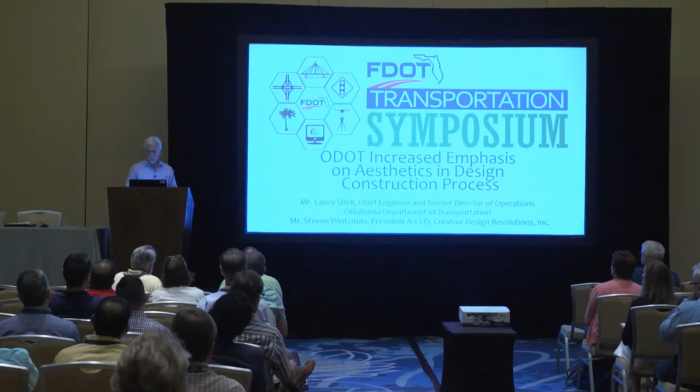I'm gratified at what a good turnout this is. There's not a lot that I can add to this. When two directors of a DOT, chief engineer, district engineers, community members, mayors, directors of operations get together and they say this is bringing value to our city, especially people that are very mindful about spending monies.

It's something that people like us, who have devoted much of our lives to infrastructure, pay attention to. I can speak to what CDR does, Creative Design Resolutions, because we are the premier company that incorporates aesthetics into infrastructure. We've worked for a quarter of all the DOTs in the country, and we've done this for nearly 25 years. I'm sure there are others that do it, so I'm going to talk generically, but I'll speak to how we do our business, because I think this might be very informative.

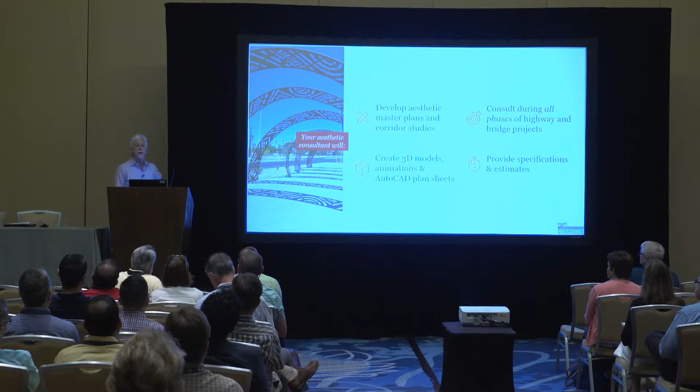This is not aesthetics that are just going to, as you've heard said, put lipstick on a pig. These are things that are actually incorporated into the architecture, into the programming, into the engineering of your projects, defined by what the client wants, the stakeholders, and their constituents.

And what we do to do that is this: we have community meetings, and we show past work like we're doing now, and engage a conversation. How do you feel about yourself? And then in the end, when we come back, we will provide aesthetic suggestions. And then, of course, in the end, we do 3D models. You'll see some movies and so on as a way of visualizing what this is going to look like in the future, and options derived from you all, not just by a design firm.

So these aesthetics specifically are built to be from your community. They are contextually of this place. If you moved it to somewhere else, it wouldn't fit anymore. It tells a story. What we say at CDR is that we're storytellers of the clients we work for.

The most successful urban design projects come through a collaboration of communities in the development and design process. We track the engineers of record, or in-house engineering, with our aesthetics. So each project is site-specific, and it will tell the story of your community.

By the architecture all around, right? The history, your commerce, your vision, your values, the natural environment, your aspirations for the future, all of that. Why not incorporate that into your structures? Why not? It's just concrete, and you're going to have to form it anyway.

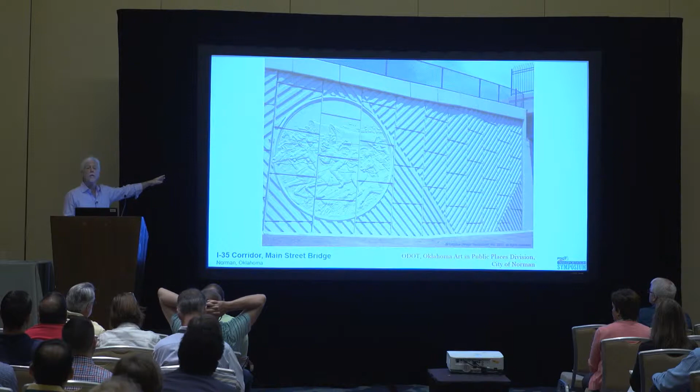So first thing we'll talk about is bridges. Casey mentioned this detail here, this medallion on the bridge, on the Main Street Bridge. First of all, just to keep in mind, this 18-foot diameter MSE panel, that relief that you see, that's foreground, middle ground, background. The depth of relief there is 1.5 inches. For all of you who think this is going to be a very expensive proposition, all this stuff you're seeing, you're mistaken. But I didn't show you the slide for that.

I showed you the slide for those flutes. You see those flutes that were created to make these gigantic triangles look like topography that you might see on the plains of Oklahoma, like this. But remember now, we are designing these things to be repurposed, to be modular. Every design you see here, every design we make, is a modular design, meaning it doesn't have to just be used this one time, this one way, and repeated and repeated and repeated. In fact, it can be reconfigured, reoriented, combined with other designs to create the story of your state.

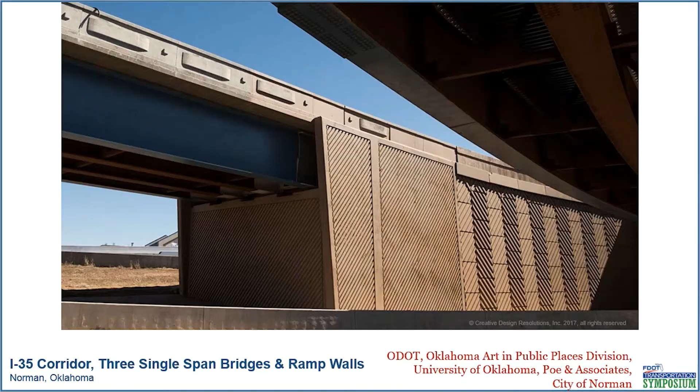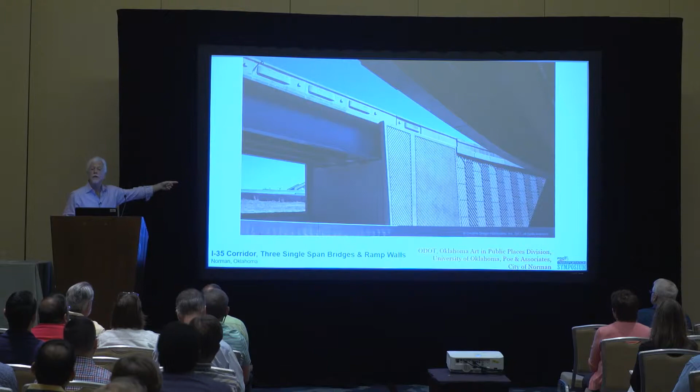So you look at this design, and they didn't have a lot of money. They had about three single-span bridges and tens of thousands of retaining walls. So we just took it and we reconfigured those same liners that they own. This is the key as you're looking at this. Director Ridley and I came up with this idea.

Think about normal means and methods and business practices of your contractors. They will buy the cheapest form liner they can to do that fractured fin on the wall. You get 2 or 3 pours out of it, then they'll throw it away, move down, get another liner, and so on down the line. All that adds up.

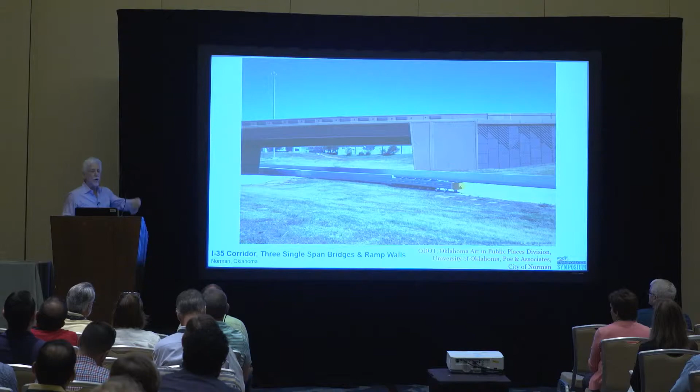Versus we specify urethane liners, you can get 50 to 100 usages out of it. So a little more investment up front, but it exceeds the first project. They warehouse it, they account for it, they qualify it and quantify it. They check it in and out like library books. This makes the next project thousands of dollars cheaper, and if the contractor doesn't take good care of it, they have to replace it.

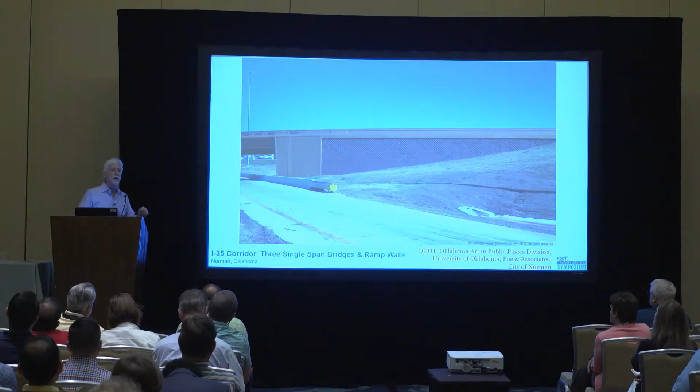We changed, slightly, the way the state contracts for these projects. Because who owns these things in this state? Not the contractor. You do, because you paid for it, you see?

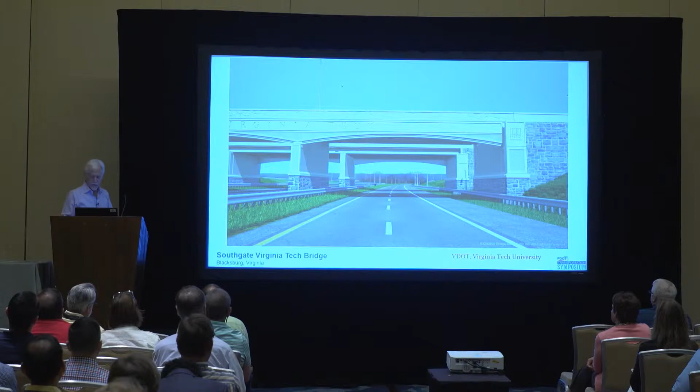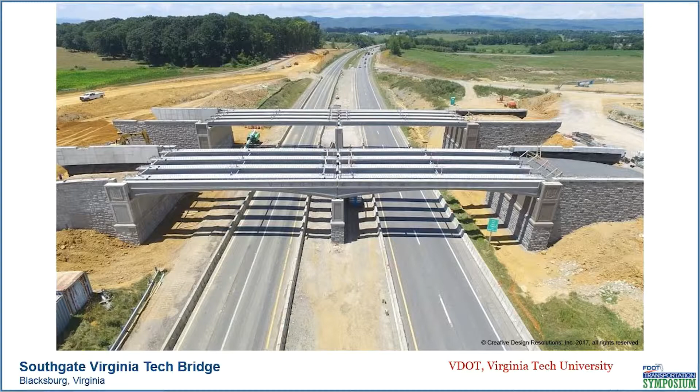So now I'm going to move outside of Colorado to give you a quick overview of other work. Another bridge before a university, this is Virginia Tech. They have Hokie stone, their favorite little stone they use. So this was a quick computer model, and this is the bridge being built right now. You can see the spandrel being installed. Really, anything is possible.

Concrete is the cheapest, most plastic material you can use that has the longevity that it does. There's so much more that we can do with it.

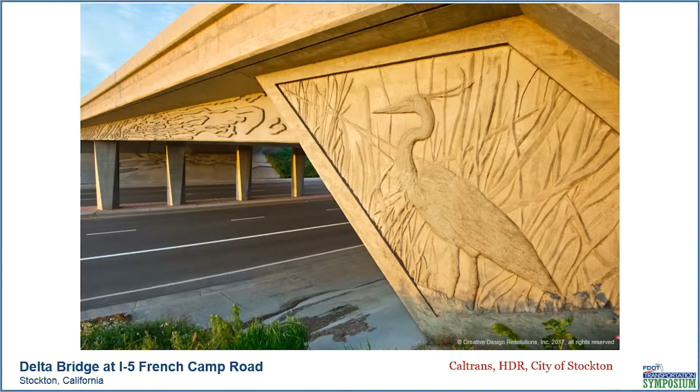Caltrans, we did this wonderful project for Caltrans in Stockton, California. They don't like staining their bridges because it gets tagged. We did this bridge a number of years ago, and it has never gotten tagged. In fact, I'd say 99% of the bridges and highways we've ever made has never been tagged. One reason is this: we get the community involved and they take ownership, they have something to say about what it looks like, and they like it.

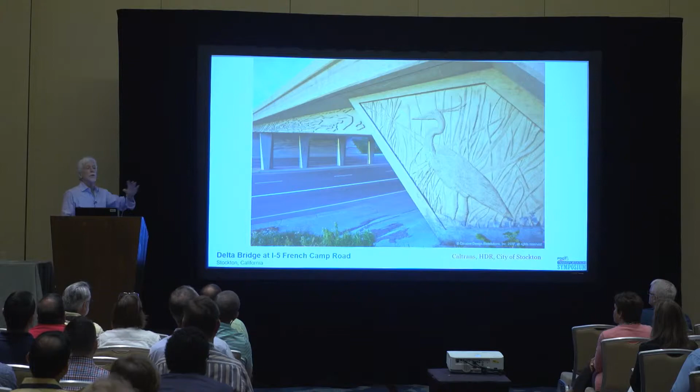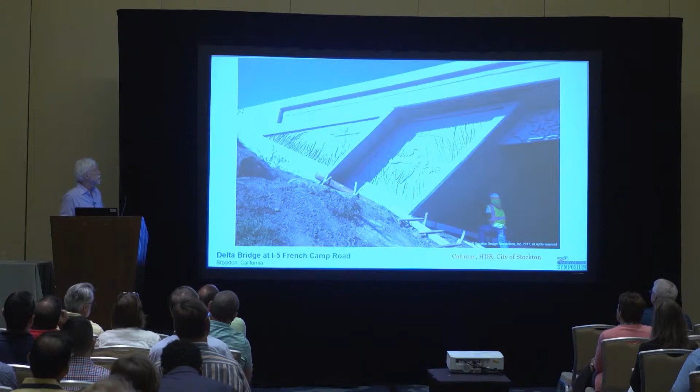So here is Stockton, California, the breadbasket of this country. It's all about the delta, the flora and fauna, the water going through it and the natural environment. So you see that in the wing walls. You see how we have trout, great blue herons.

You'll see this precast, prestressed concrete beam that looks like the delta as seen from a plane. And then something like this, which I'm sure you have never seen. Slope walls are a wonderful, large bit of architecture that is unused. We stamp them, we sometimes stain them, but in this case we wanted to make a view of what the delta looks like from 100 miles up. So we just used what you're looking at here.

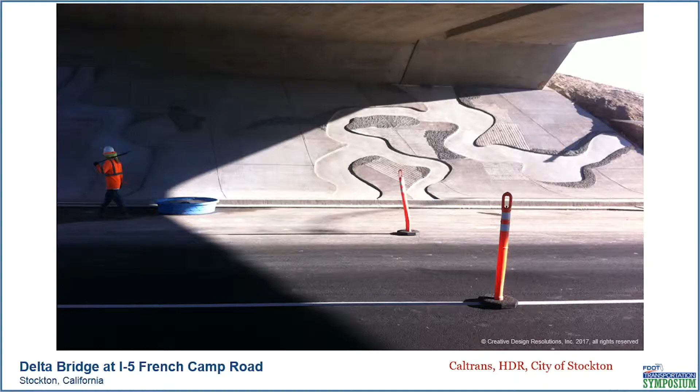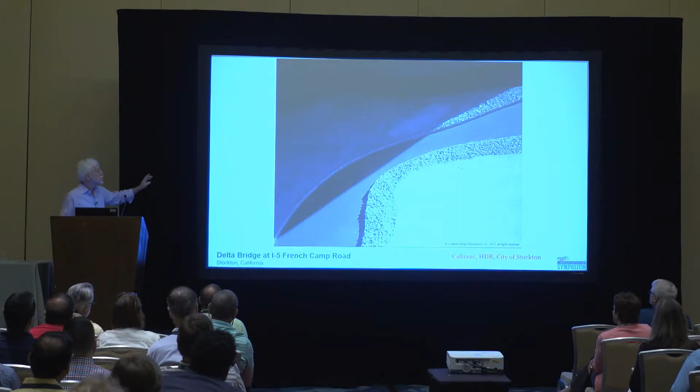Each one of these slope walls is 60 feet high and hundreds of feet long, using metal trowels, raked finishes, timing, all those different effects. Each one of these was done in one day. It just followed your contractor. Nothing that you see here delays a project or creates a cost overrun. We've been doing this for nearly 25 years. We have never once been late, and we have never once been over budget.

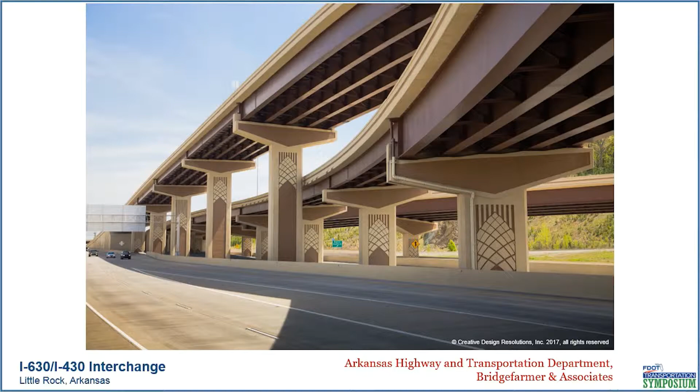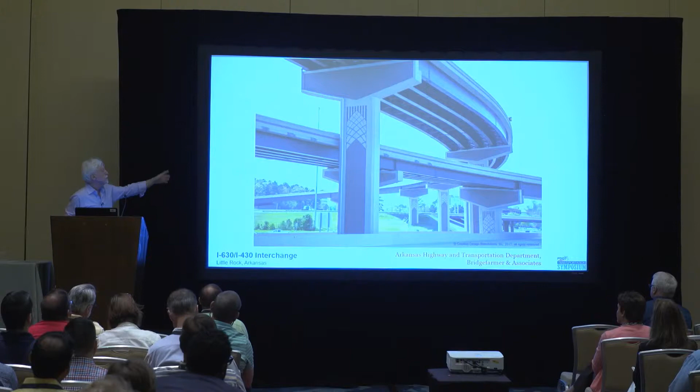We track you. This was a great Big Rock project outside of Little Rock, Arkansas. They commissioned us to design it. They had just piers after piers after piers, so we created a modular design that could grow and shrink, that could be organized by color. This flyover ramp, a bent of piers or collection of piers, may have one color, and this one has a slightly different color. Of course, that's a stylized pine cone from the loblolly pine, the state tree, in case you didn't notice.

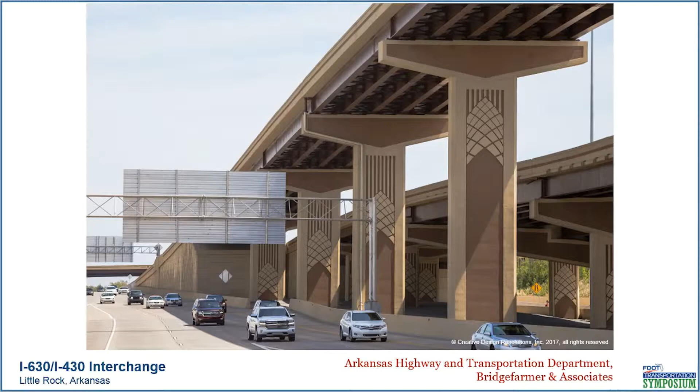And on their parapet, see how elegant that is, timeless in its design. It's just architecture, and there's the state silhouette on their parapet. I'm going to go back to that project in a moment.

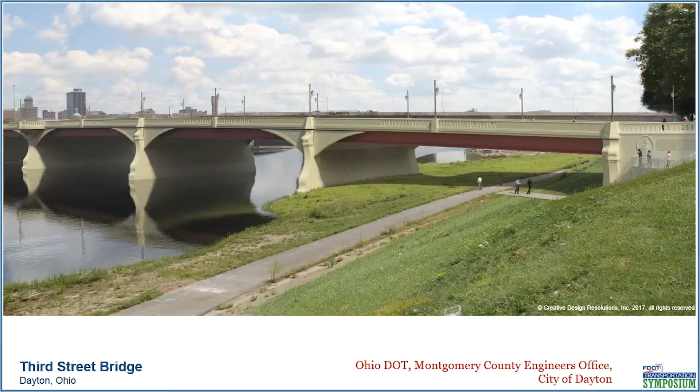So here's an interesting bridge, and this is something very important, talking about community. This is for the city of Dayton, Ohio. This city is divided by the Great Miami River. And when I say divided, I don't mean just physically divided — I mean divided economically, divided racially, divided in all sorts of ways.

So when they brought us in for this community meeting, they wanted us to somehow glean from the audience how they see themselves, what they want this new bridge to speak about. Now, of course, I go there, we do our research, and I say, well, Dayton, Ohio, that's where the Wright brothers created their plane, the Wright B Flyer for World War I.

That's another important aspect of Dayton. I had some ideas, but I didn't want to go in with any prejudice.

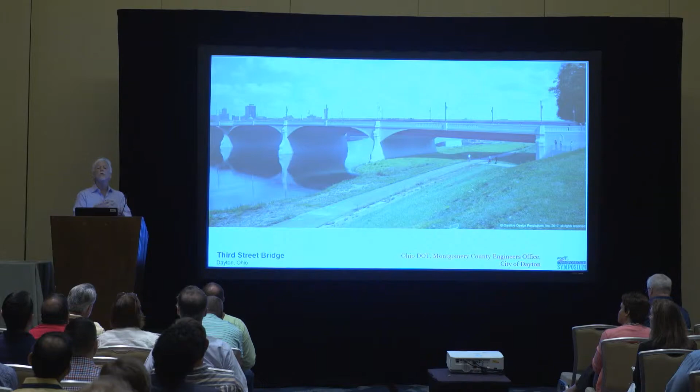I walked in, and the entire audience was African American on the west side. I'm standing in front and I say, okay, please tell me about this bridge. Tell me about your city. What do you want? And they said, do you realize we close this bridge down once a year in solidarity to the Selma March that Martin Luther King had?

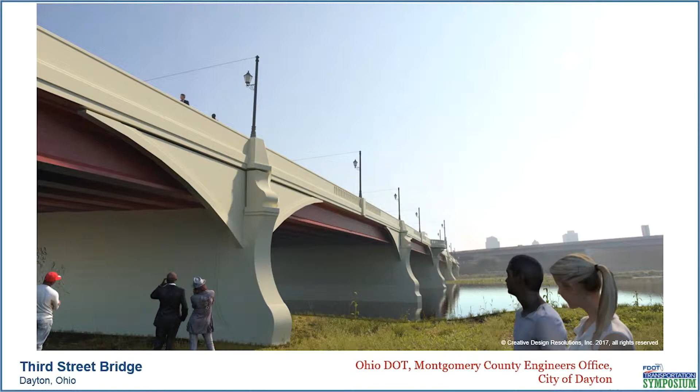This road is called Martin Luther King Boulevard. This bridge is called the Peace Bridge. Oh, did I not mention that on the west side, the opposite side of downtown, the African American neighborhood, that's where the Wright brothers had their bike shop? That's where the airplane was invented. You start seeing how important that side of the city is.

And the building stock looks like, well, Georgetown, like Virginia—old, beautiful architecture. How do you tell that story? How do you involve all these people, downtown, all nationalities, all histories? How do you do that?

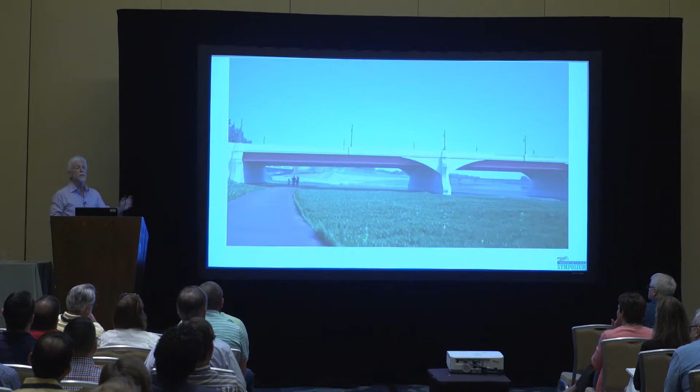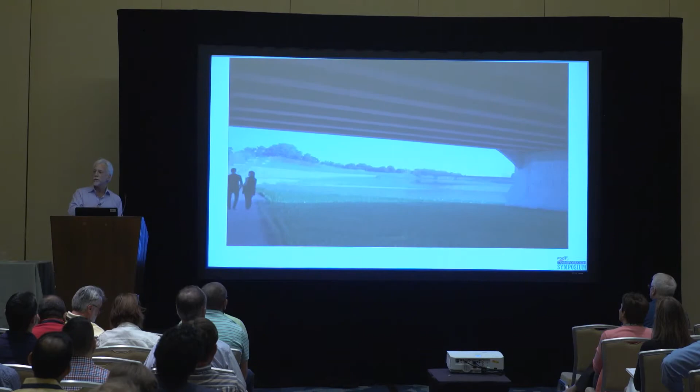Well, because there are locations to do that. If you have a bridge with light rail on top and bike riders going across, how do you get from there down to the hike bike path at the bottom? How do you go from the hike bike path up to the very top? What do you want that experience to be like? Do you just want them moving from point A to point B? Or how about telling the story of why you're there, why this is there, why these people are there? This is an opportunity to plant seeds.

Hold on, let me turn this down.

Okay, all right, this is another project. When we have a chance—like the previous project you saw—we were able to design the architecture as well. When the engineers allow us to come in early, we can actually affect the architecture, and that's where it gets really inexpensive.

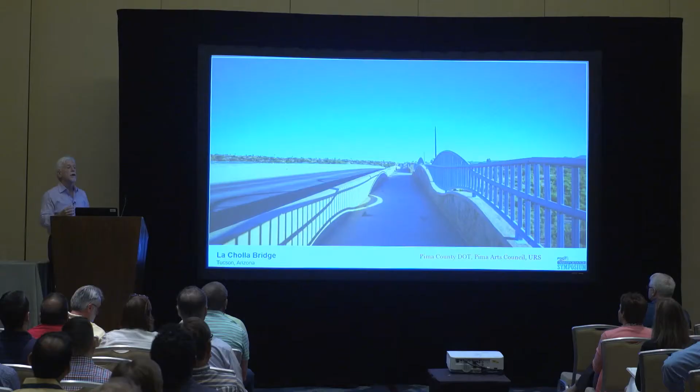What's the difference between a pier bent with round column piers, square column piers, hammerhead piers, or a pier wall? Nothing. They all carry the load, they all cost about the same. It's the architecture—does it support the theme?

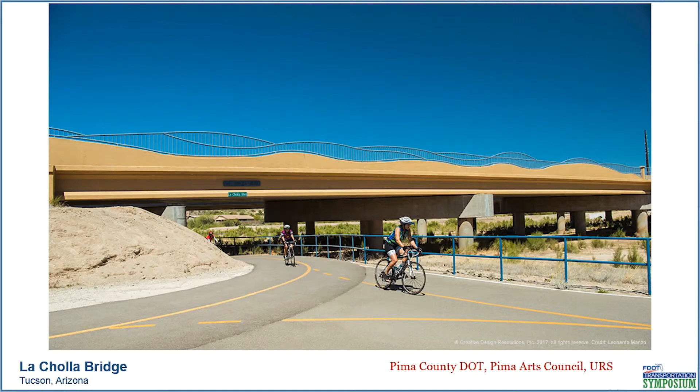The La Cholla Bridge was built over a wash with a few neighborhoods in it, and our challenge was: Stephen, we want this to be a signature bridge, but we want it to be invisible. We don't want it lit up. We want to see the stars at night, but we want it to speak to where we are.

We're in a wash that divides the city when it rains. It's La Cholla Bridge, which means the cactus. How can you make this bridge noticeable, signature, but invisible?

We recommended you take the sand from the wash and use it in your concrete mix. You take the color of the sand from the wash and use it for the stain. You take the parapet and undulate it like it would be water. You make the railing undulate like water. And you take the inside of the parapet and put reliefs of chollas on it. Why not? You have to cast your concrete against something anyway.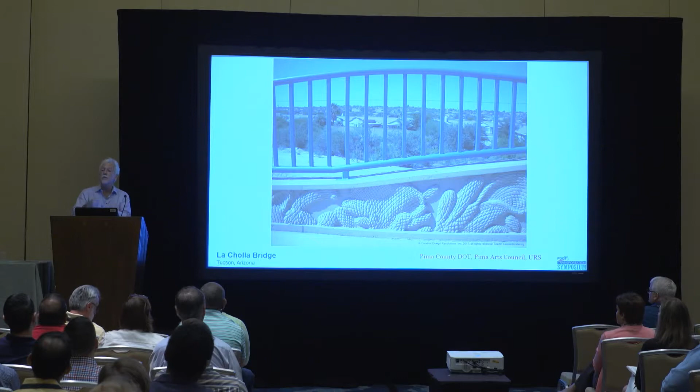In every square yard of concrete, one of the aggregate line items in the cost of making it is the form liner—aggregate, water, cement, labor, forms, form liner. It's already in your budget. It's how you use that money and how it can serve you later.

So look at the opportunities. Anything is possible. And that's just bridges.

Retaining walls—imagine having a design like this. Each one of those squares, just so you understand scale, is 12.5 feet square, 25 feet high. This design is 4 miles long, and it doesn't repeat.

And there are only 24 liners. But those 24 liners can do this, this, this, this, this, this—so many combinations, permutations, unlimited. Reusable over and over again.

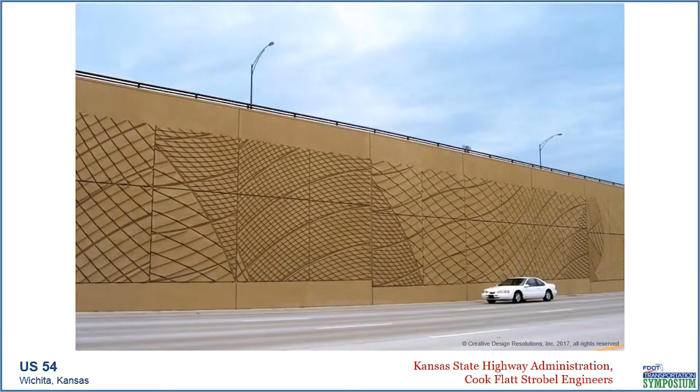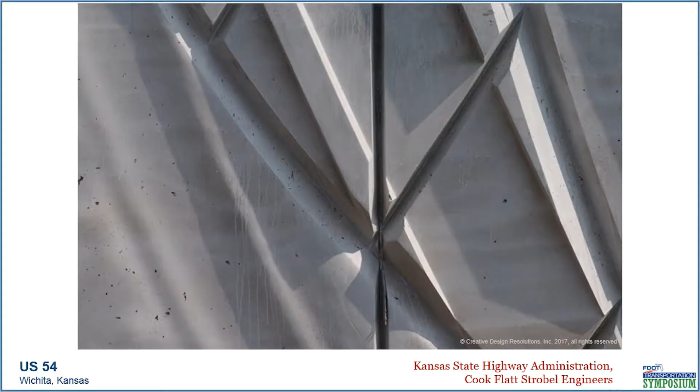Look at this design, this design, this design—these are all from the same form liners, and that's what you're looking at. So this is the detail. These are all dentils, some thinner than the side of your hand, poured from 25 feet, 72-foot wide pours, in fiberglass form liners.

Anything is possible. Look at that detail - this is all green concrete. None of this has been pointed up, by the way.

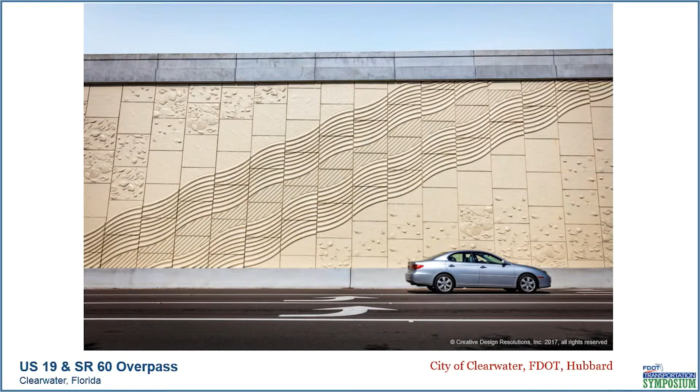Now, a project I'm very proud of in Clearwater, Florida. This is for the city. The city did not have a lot of money - they had a very limited budget, and they said, Stephen, we don't have a lot of money, but we really want to show this is really the beginning of water, sand, play. We would speak to the city and ask, what can you do?

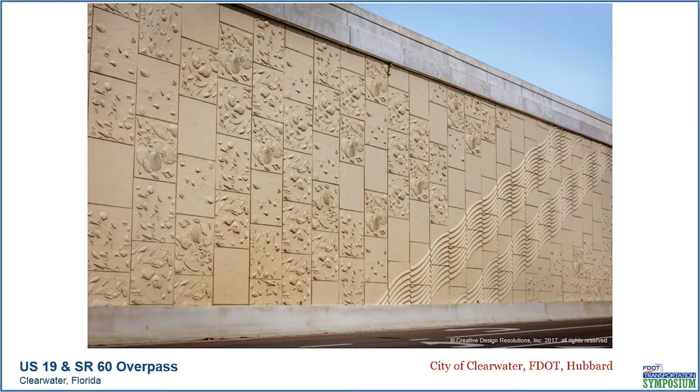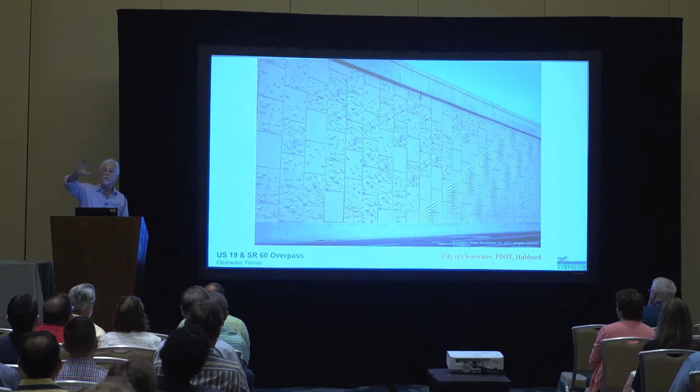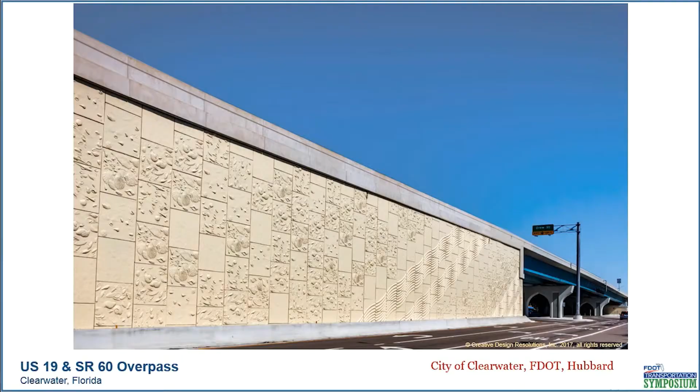So what we did is we designed it with, I think, 4 form liners of shells and 3 form liners of water. But did you notice that? Doesn't it look organic? Doesn't it look natural? Does it look like a stamped pattern? No. Each one of these form liners can be rotated, each one can be reconfigured over and over again - they're the same form liners. It's how it's designed. And when you're designing it, that's where the economy comes in, because it's designed within the functionality and safety of the bridge. It's not an afterthought - it starts at the community outreach.

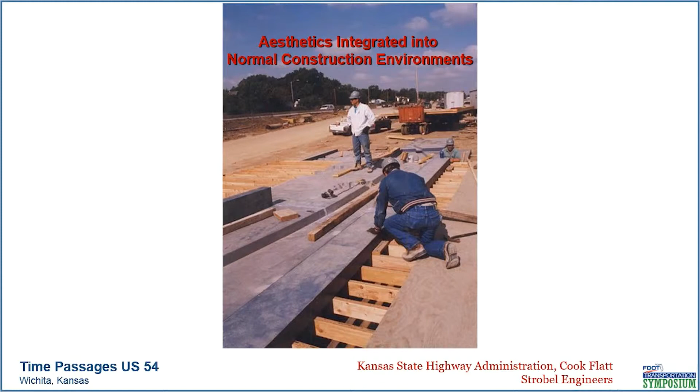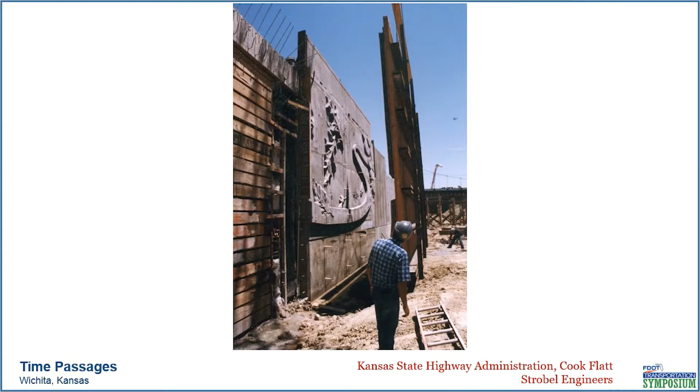It starts at the conversation that precedes that with the client. Natural means and methods - there's nothing unique about this. You've got your forms, your beams, and you put your form liners in. You attach it, you erect it, put it up against the wall, block out the sides, put in your reinforcement, and pour from the top. But when you strip it, instead of it being a brick or fractured fin pattern, now you have flying leaves, now you have a working 25-foot sundial, now you've got quotations about the passage of time. I mean, anything.

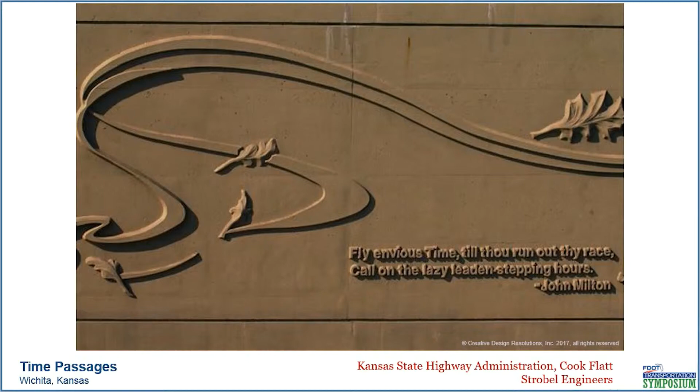This is the state of Florida. There's so much to say about this state - it amazes me, because I've been coming here my whole life. There's so much that could be represented so easily, timelessly, and it's so easy to do. The integration of this is as simple as this to that.

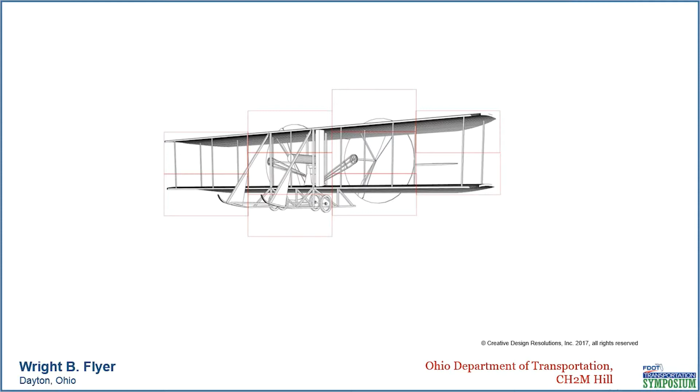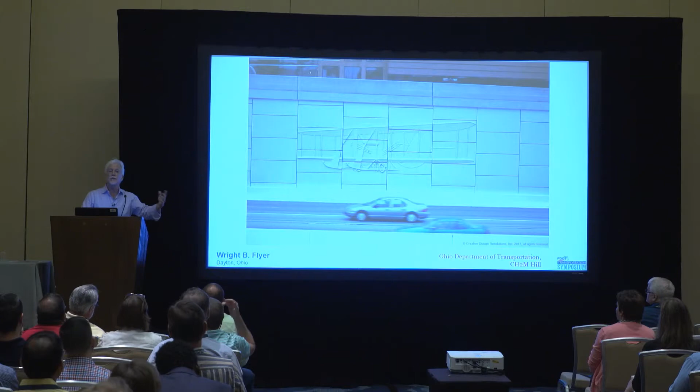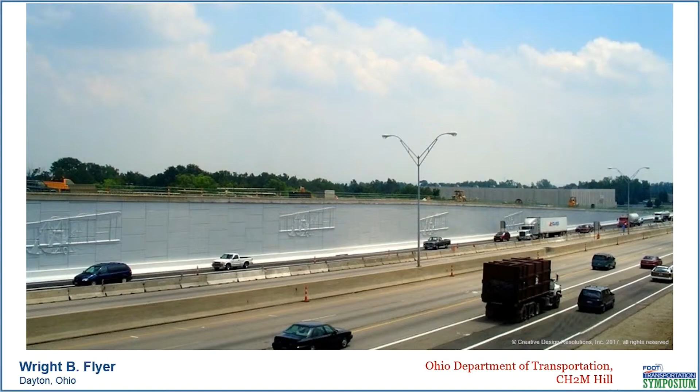Because what is it? Nobody's getting pretty pictures, by the way. The contractors - we do the specifications, all the plan sheets, the details, the sections, the views, all of that - but they're just getting lines, words, and numbers, just like everything else. Same means and methods. This is to celebrate the 100th anniversary of the Wright B. Flyer - this is now an icon. A lot of these things are all award-winning projects, and I put 3D glasses on that back table, like a business card you can take with you. All of these things are all over the country.

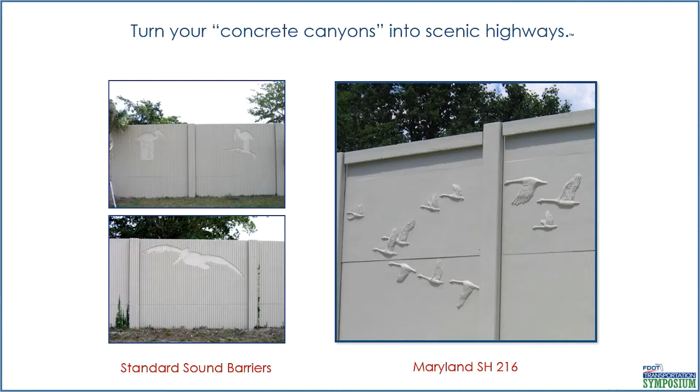But one more thing about modularity: sound barriers. To the left is what you all have in a lot of places now, right? You have a fractured fin, a silhouette pushed into it. Think about what that is now - you are paying for that much concrete, every one of those strips, for miles. Think about the cost to make that impression.

Versus you start at the zero point, which we call the background, and you can make the most extraordinary, beautiful, detailed version of whatever you wanted to do here at a fraction of the cost. Right there is cost savings, saying the same thing - you want to talk about the local bird, but done two different ways, and the difference in cost is extraordinary.

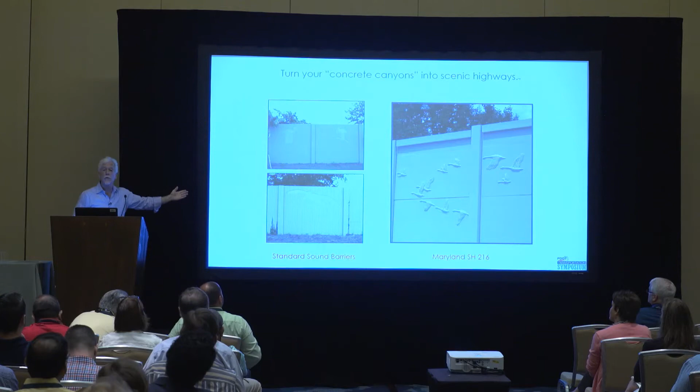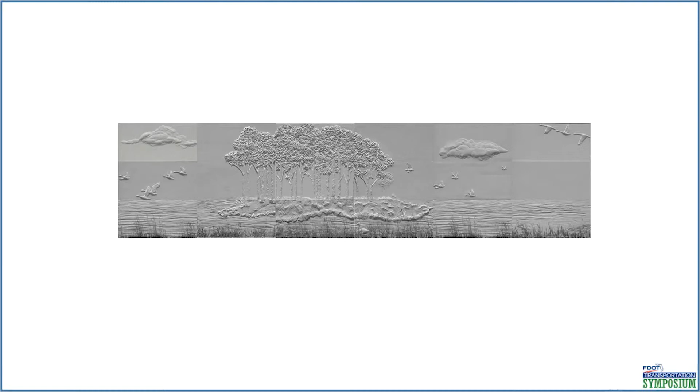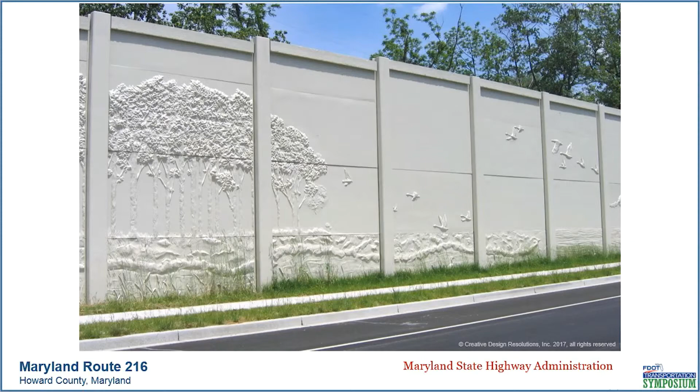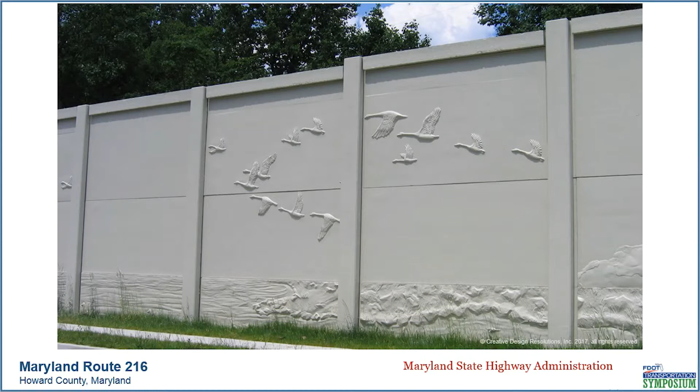So what I'm here to complete this session about is talking about modularity. With modularity, you can take a configuration of one thing, and if you just look at it differently, you can reconfigure it and create something else. We have a project you'll see here - sound barriers of a forest, water, birds and clouds - and there are so many combinations and permutations of this. You could take the tree trunks out, drop the canopy down, now you have bushes. Take the clouds out and put birds flying. You can take one end of the forest and the other end of the forest and make an island. It just goes on, it's endless.

Now, if you had an inventory of designs like this, with great blue herons and the different flora and fauna of Florida in your inventory, then you can mix them all up.

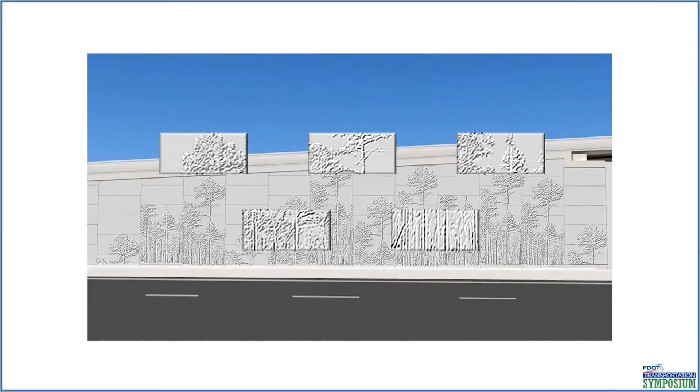This is, I think, the best example of modularity and economics, because this is something all of you are thinking about right now: the economy of this, and is it going to slow your project down? It will not slow your project down.

That Little Rock project I talked about—at the very end, they said, CDR, oh my God, we totally forgot. We have 250,000 square feet of MSE wall, ramp walls we need to cover, and we've run out of money. I said, can you afford 5 liners? They said yeah. I said, then what's your state tree? They said the loblolly pine. I said, okay, this is what I can do for you.

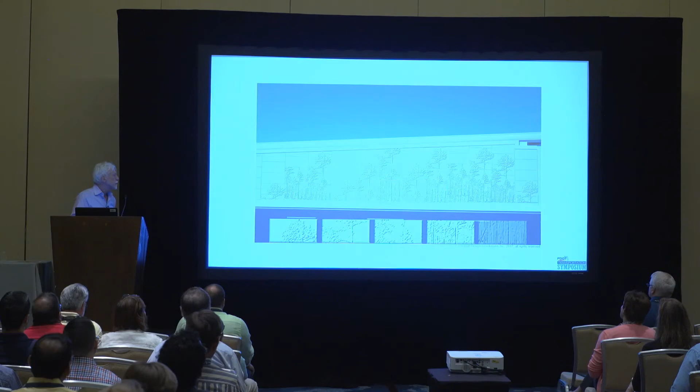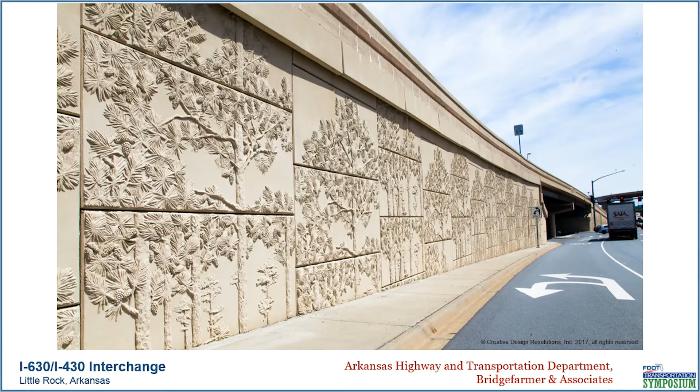And I showed them this. So that asymmetrical looking forest is made up of only 5 liners. That's that one—remember, I can rotate them. That one. See? Like that. It doesn't look like that at first blush, does it? But then you look at the detail over miles and miles of ramps, and all of them look different, because you can do it any way you want with 5 patterns, 5 liners.

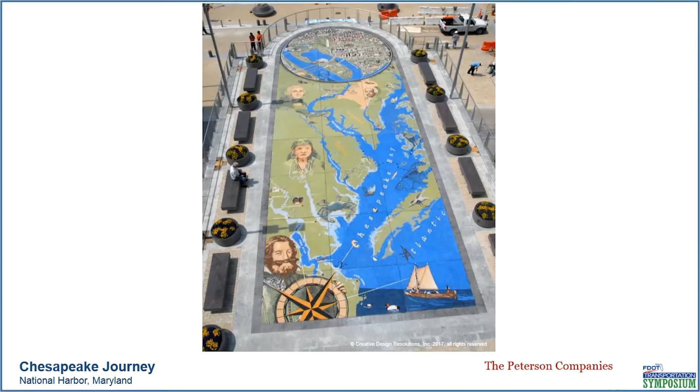And of course, urban environments, that can go on forever. We use a material called Faux Terra, which is full color structural concrete, poured, 7,000 PSI. Your turnpike or toll booths have that concrete sign that says SunPass, but it's monochromatic. I understand why—if you painted it, the UVs would just bleach it out. But remember, concrete you can do anything with, so it could be in full color. You can cast it in full color.

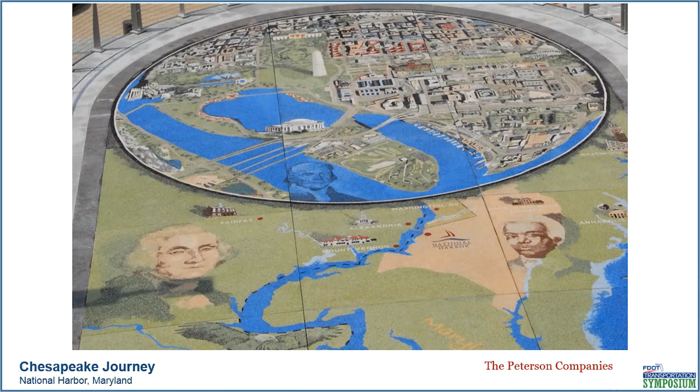This right here is in National Harbor, outside of Washington, D.C. It just looks like this giant painting, but if you look very closely, this looks like Washington, D.C. as seen under a magnifying glass. It's a story about the discovery of the headwaters of the Potomac. The entire thing is made out of pea gravel, controlled certain color, recycled glass, polymer, superplasticizer, cement, water, and oxide pigments—that's it. We've been using this for 30 years, completely colorfast.

But what this really is, is a game. It's a pedestrian facility, and it's a game—like the old Highlights magazines you remember as a kid, with pictures where things were hidden and you had to find them. Well, that's what this is. It's a game about the history of this area.

And the clues are engraved on the benches, and nobody tells you. But when you figure it out, the game is on and everybody's running around, engaged. Look at that—hairline registration, gradations across color fields. You hit it with a hammer, and the color goes all the way down through the reinforcement.

Plazas, sidewalks, sides of buildings, precast structures for the turnpike, et cetera. The whole idea is that you're just walking down the sidewalk and the brick edging starts to tell you a story—a poem, a historic fact, since it's a pedestrian facility. It's engaging you as you walk, and then all of a sudden you get to an icon that speaks to what that story is about, or its conclusion. All of this is structural concrete—benches, anything.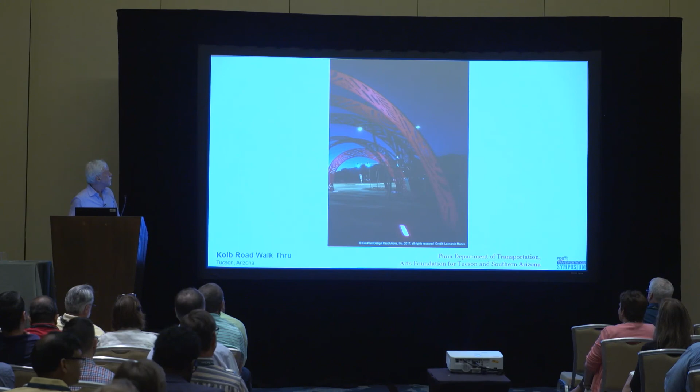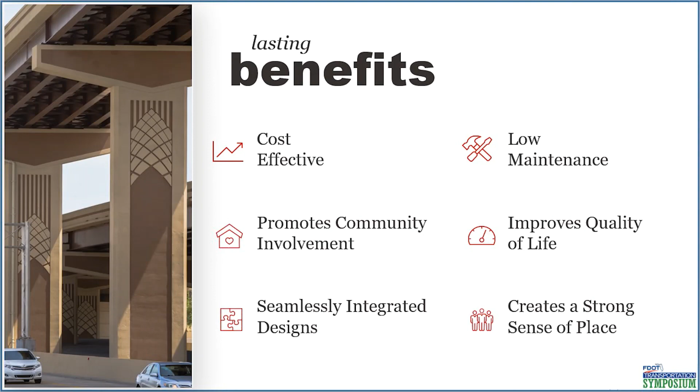And so, just in closing, no matter who does this for you, it has to be on time and on budget. It has to be low maintenance. It has to be safe. All of those things are the prerequisite. And after that, promote your community involvement, quality of life, and sense of place. Thank you.